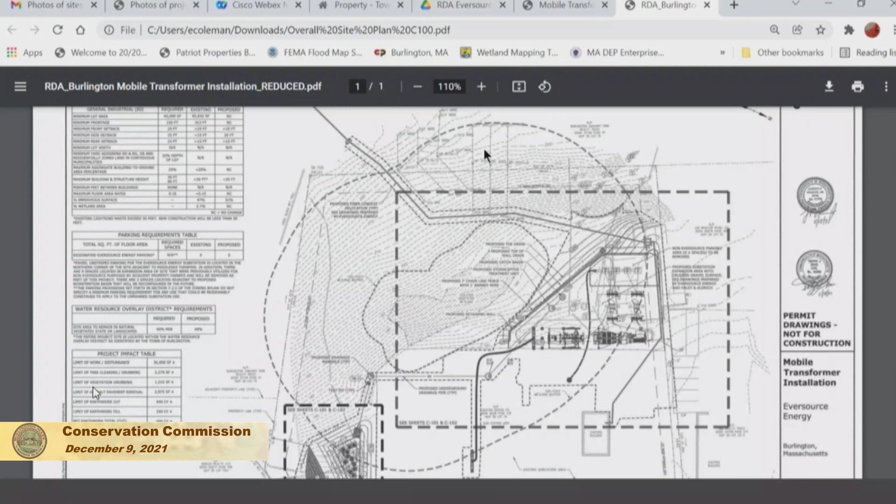Thank you. Good evening, everybody. Tighe and Bond filed a request for determination of applicability on behalf of Eversource for the proposed installation of a mobile transformer, part of a proposed expansion of an existing substation at 64A Middlesex Turnpike. The RDA is filed because there is an existing isolated vegetated wetland within the 2.2 acre parcel. We delineated that wetland in October 2021, and it is jurisdictional under your bylaw. The RDA is being filed because a portion of the proposed work within the subject parcel is within the 100-foot buffer zone of the isolated vegetated wetland. However, there is no work within the 20-foot no disturb zone, and no work is proposed within state jurisdictional wetlands.

In terms of our request, we're requesting the commission consider issuing a negative determination, confirming that the proposed work will occur within the 100-foot buffer zone of a locally regulated wetland, but will not alter an area subject to protection under your bylaw or regulations.

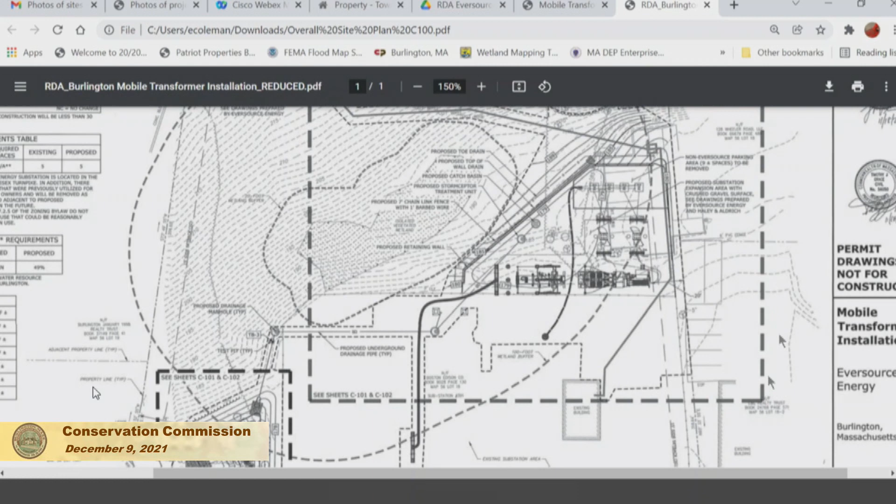In the middle of the plan sheet there, you can see the isolated vegetated wetland and the 20-foot no disturb zone. We have an approximately 26,000 square foot limit of work that is demarcated with hatched lines throughout the substation parcel.

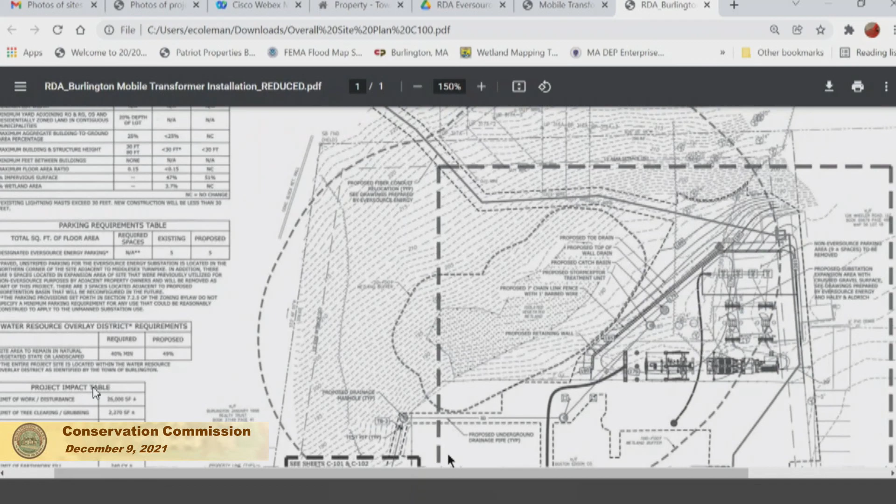Approximately 16,000 square feet of work is proposed within the 100-foot buffer zone. We've been careful to limit disturbance as much as possible, so about 2,370 square feet of vegetation removal and grubbing is proposed, a portion of which is in the rear of the substation in the proposed expansion area, which is about 6,500 square feet. Also in the southwestern portion of the parcel, bottom left corner of the plan, is a proposed bioretention basin, so there's a little bit of grubbing that will occur in that portion of the site.

There are 6 or 7 main components to this project. The main portion is the expansion of the substation, about a 6,500 square foot area in the rear, where the proposed mobile transformer, circuit switcher, and other related equipment will be installed. We also have a proposed 142 linear foot retaining wall to the left of the proposed equipment, and the proposed bioretention area in the southwest corner of the parcel. Throughout the site, there's proposed ground grid, underground distribution, conduit circuits, and fiber relocation areas.

In terms of construction period BMPs, we're proposing a number of them. On the plan sheets, we depict a stabilized construction entrance in the northern portion of the site, and in our details we show a stockpile protection area. We've also got silt fence and protective measures around the isolated vegetated wetland and other areas of the site.

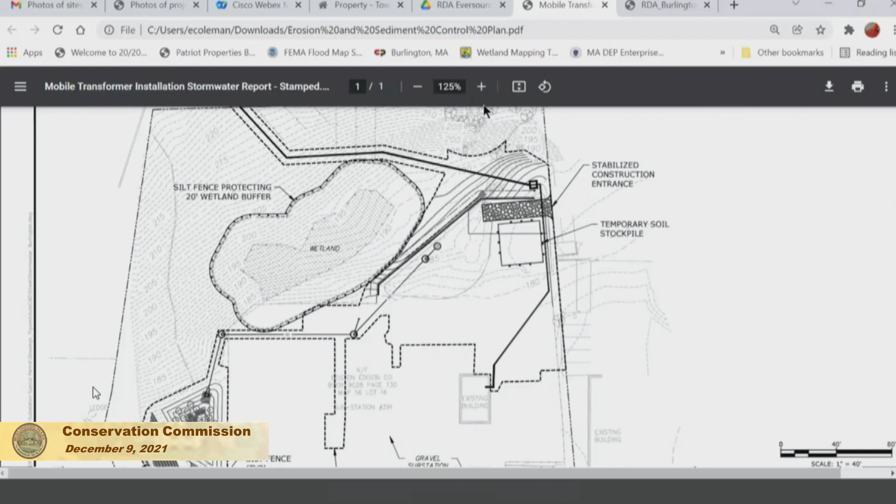That's an overview, but at this point I'll open it to questions, or if you'd like more detailed information on any pieces, we can elaborate on that. Ms. Roberts, thank you for that.

Ms. Roberts? Yes. Could you, before we open it up for questions, elaborate a little bit more on how the drainage is now and how the drainage will be, for the commission? Where stuff flows, here's how it flows now, here's how it will flow, or if there's no change, you would say that, for example.

Okay, if you don't mind, I'll turn that question over to Tim Grace. He's our engineer and designed the stormwater management system.

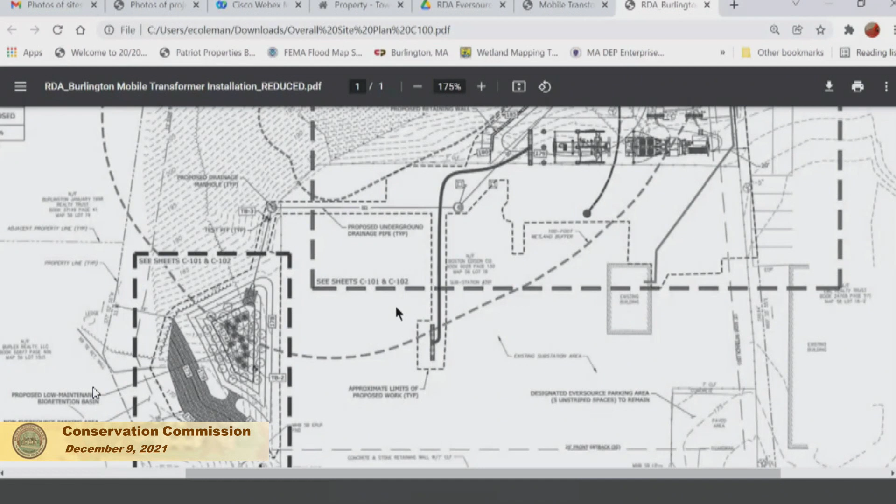So I guess real briefly, the existing stormwater at the site isn't really treated at all. It essentially just flows off in a couple of directions to the northeast and then to the south, because there isn't any existing stormwater management at the site. What we're proposing is somewhat of a prototypical system with deep sump catch basins, drain manholes, and a stormwater treatment unit to eventually daylight to a bioretention basin that is proposed to be planted with low maintenance, pollinator friendly native species of plants. So based on that alone, it's a significant upgrade to the site just by introducing those features, and being able to actually detain, collect, and treat the stormwater before it's discharged.

Okay, and does the stormwater end up at the bioretention area at all? It does. The stormwater is basically detained completely in the bioretention basin because it's been designed to accommodate the volume of water for the 100-year storm. So even in a significant storm event, we don't expect to have any water actually leaving the basin. It's going to be detained and infiltrated there.

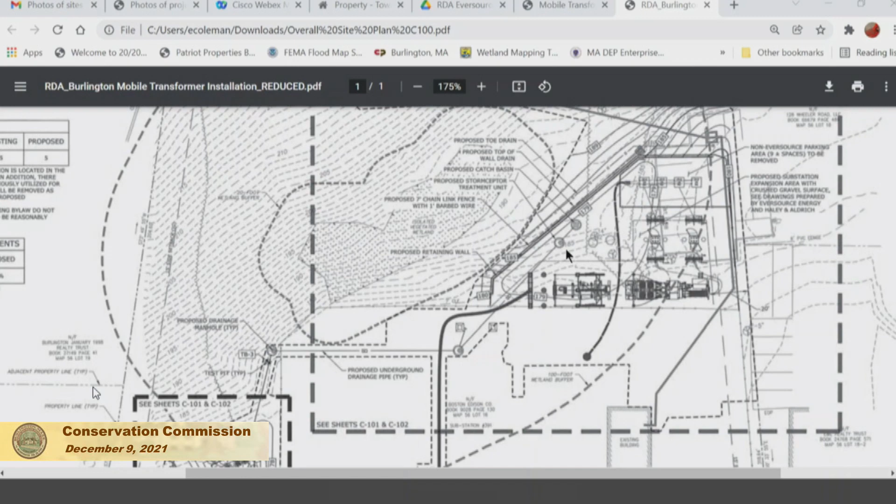Well, that'll be me. So as Jessica explained, this is an isolated wetland, so this project is jurisdictional under our bylaw only. They are doing some work that's coming fairly close to the wetland, including building a pretty significant wall and removing some vegetation. But I am pretty impressed by their proposed stormwater management. I like the fact that so much of it is being addressed, and so much of it is going into a bioretention area, so it's a nice LID feature. I don't have any issues with this project.

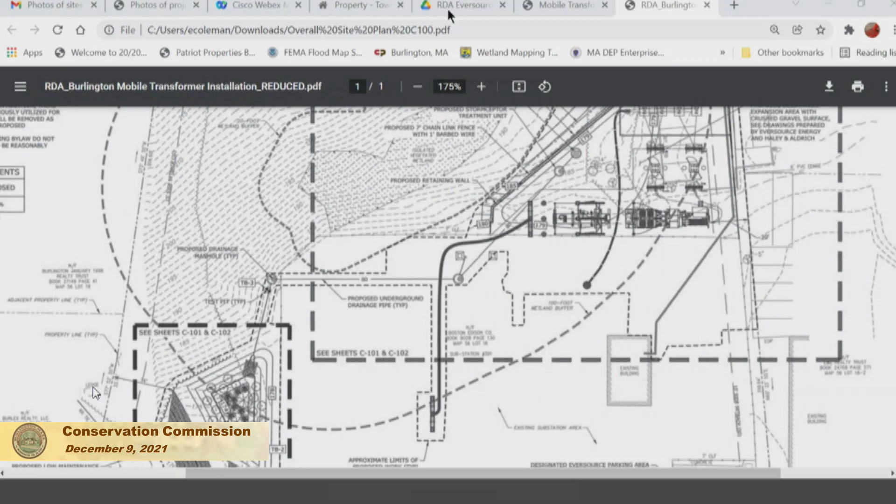It is driven in on a truck, so there will not be any foundation.

No earthwork. There's a little bit of a pad. Eileen, I think you might not have it pulled up, but we do have an image of what it looks like in our detail sheets at the end of the plan set.

Sorry to put you on the spot. No, you guys continue chatting and I'll find it, okay? Okay.

Yes, so it will be driven into the site, into the expansion yard. And you said there is a retaining wall, I see. How high is that retaining wall? Maximum 16 feet above grade.

And I would assume that has been designed by a structural engineer. Yes, Haley and Aldrich was the design engineer on this project for the retaining wall. Thank you, Indra.

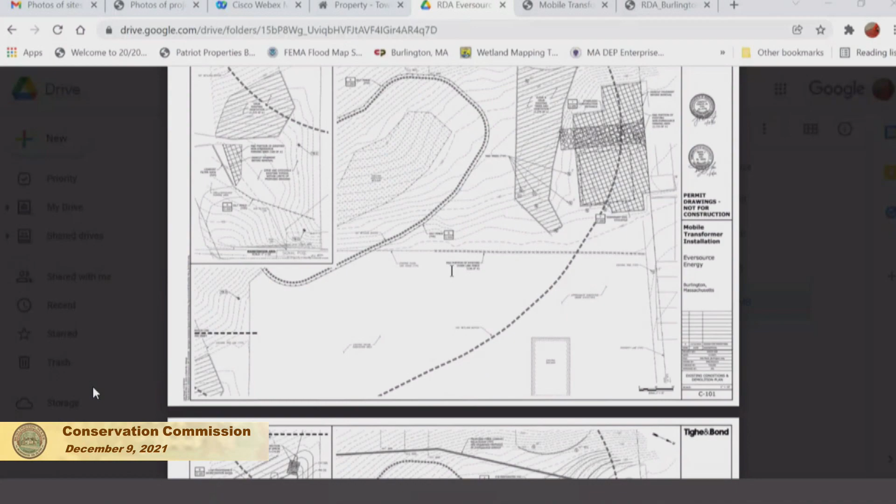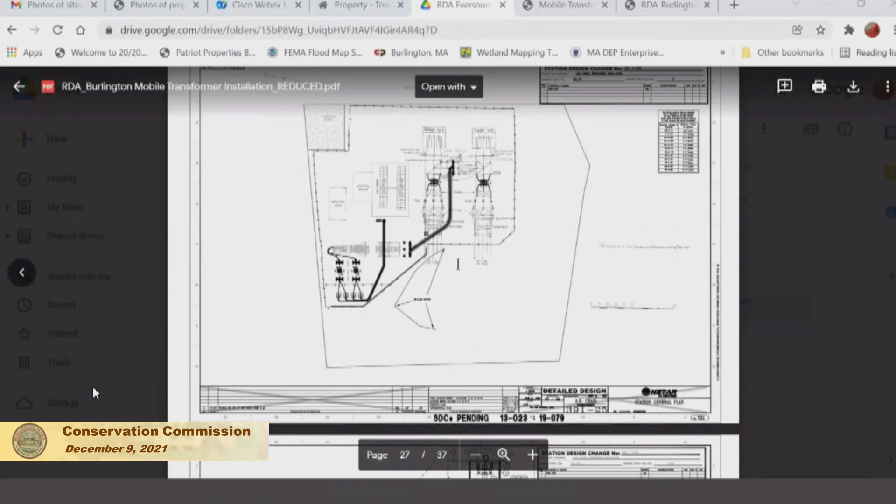Dawn, anything on this one? Jessica, which did you want to show them? It's toward the end of the set, on an Eversource drawing sheet, at the very bottom. Right before the wall sheet, sorry. Two more up, I think. There we go, it's up, one, back to this sheet, sheet 28. Yeah, it's a side view of the vehicle that the transformer sits on, right, the very bottom.

Yeah, thank you, Jessica. Yes. Okay, all right. Dawn, you with us? Yeah, no questions. Okay, all right.

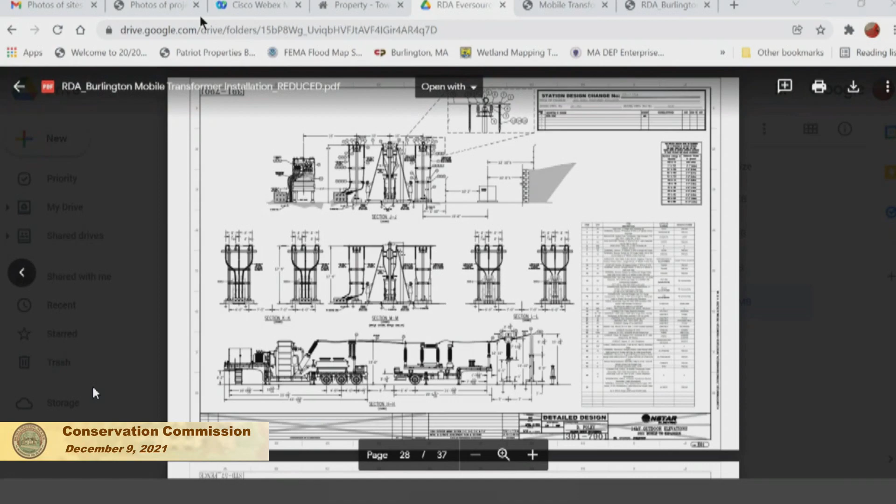And how about Bill? One question, and another educational question I want to ask. The first one: looking at the plan of the wetland area, it looks like there's quite a few gradient lines, like quite a slope. Is that actually holding water in spite of the slope? That kind of looks strange to me. It's almost a 7 or 10 foot drop across it.

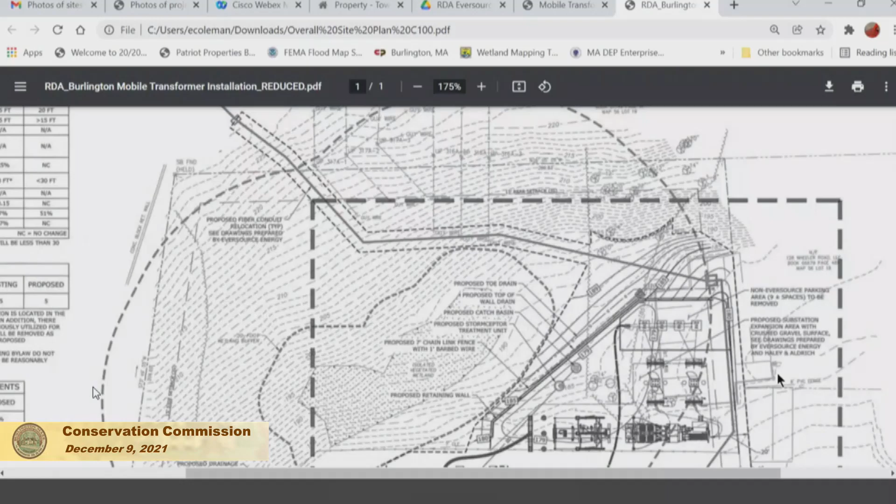It is. It's a micro depression on the slope. It's a 3,500 square foot wetland, and it's a subtle change, but the vegetation, soils, and hydrology met the criteria for us to delineate it. Interesting, because it's not really a flat water bowl of any kind from the drawing.

The other question I have is not related to conservation at all, but just to educate me: how is this an upgrade by bringing in these transformers? What does it do? Does it increase the voltage, increase the current, increase the reliability? What does it do to actually make it an upgrade?

Yes, it increases the reliability, and I will turn that over to Pete to elaborate, or to other Eversource folks if you'd like. Yeah, exactly, I was going to defer that to our team. Jeff, did you want to take that one?

Sure. Hi everyone, good afternoon board members. So the transformer would be an upgrade in the area, more so for reliability, since the capacity in the area is getting to its limit. The transformer would boost the area until we work more towards a permanent determination, because we're working on a brand new station in that specific area. So yes, the transformer will be more so for reliability and to boost the area at the same time.

Okay, thank you. Thanks, all right. Thank you, Bill. I think we're on Kent. Anything?

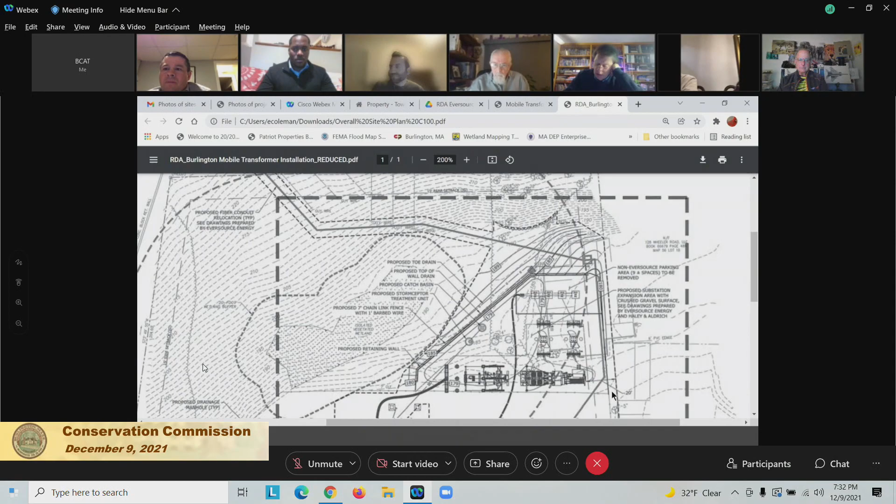I was just curious, what's the original size of the current transformer? Like what's the current lot size, square footage? Because I know it says there's an expansion of 6,500, but what's the original? I didn't see that.

So you're asking the current size of the pad where the transformer will be seated? Yeah, exactly, what's the current one? I just saw the expansion size, I didn't know what the original size was, square footage wise. I do not have that on top of my head right now, my apologies, but I believe it should be roughly 40 feet by 15 feet.

Okay, because it's going to be a trailer, like a normal size trailer with no head. It's just sitting on a flatbed trailer.

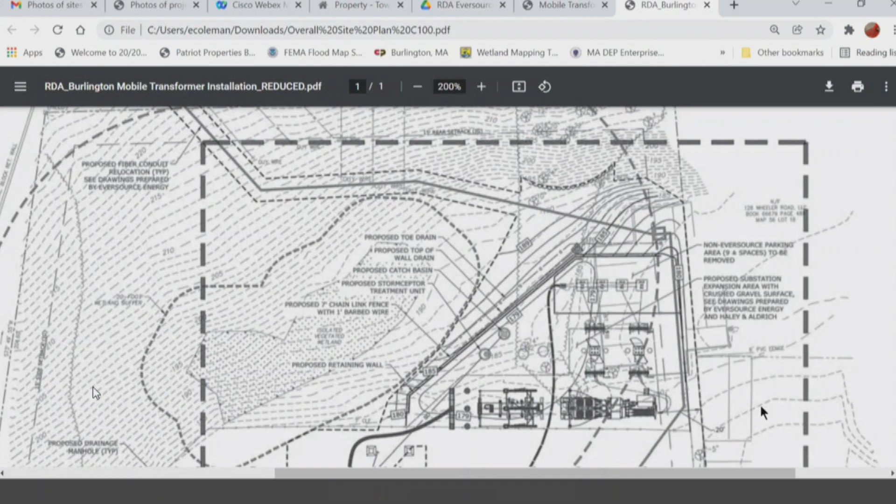Yeah, by pad, do you mean the mobile transformer pad? Yes. Yeah, actually all of that goes into that one drainage structure, CB1, within that area. Okay, got it. Now, on the bioretention area, that heavily shaded area from 178 to 170 elevation, is that like a level spreading feature for high volume water, high rain events? Yes, exactly. That's what we consider outlet protection, to make sure we don't have any scour or erosion during significant events.

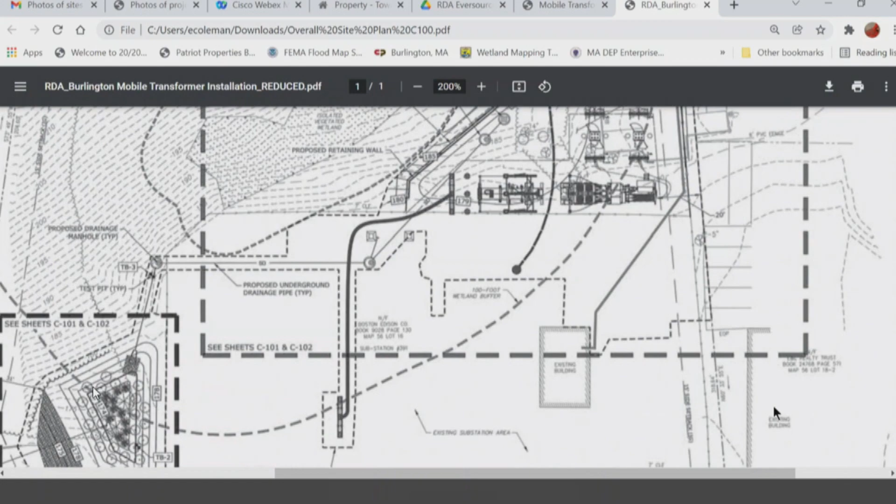All right, great, that looks smart to me. I understand now, and this looks like a substantial improvement - an unusually well-engineered and designed project for a request for determination. So you guys have probably set the standard for all future projects, perhaps, I don't know.

And Larry, John just reminded me that they also designed it to NOAA 14, okay, so a high standard too. So that's 7 inches - I mean, a 24-hour rainfall is 8.2. Is that what it is? 8.2 inches for the 24-hour, 100-year event. Yeah, 100-year, 8.5, something like that. Yeah, that's a lot of rain.

Must be climate change. Okay, is there anyone in the audience for this? This is the Eversource power station, located at 64 Middlesex Turnpike.

All right, I didn't hear anything from anyone. Is there anyone who wants to make a last comment? I guess I don't hear anyone. So, did anyone hear anything that these folks need to respond to before our next meeting, where I assume we'll talk about any changes resulting from the planning board, or alternatively, we'll be ready to just close this out and issue the decision. Is there anything that needs to be done?

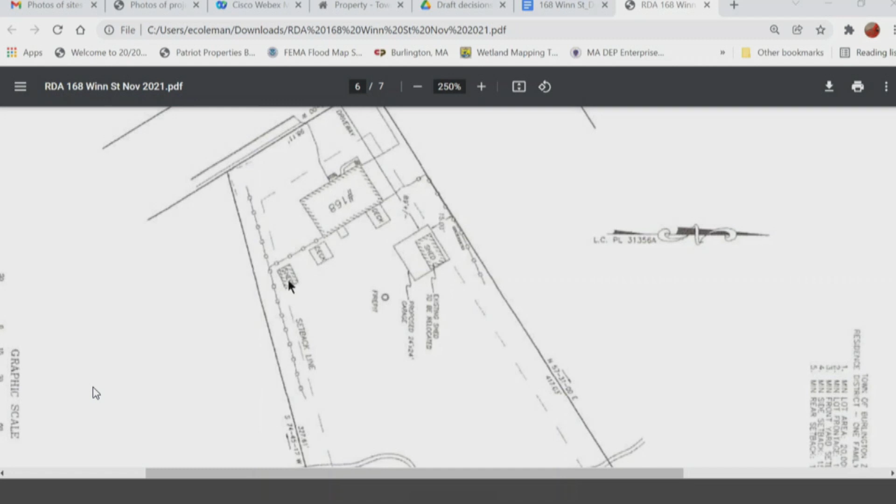All right, John and Eileen, one of you want to offer a few comments, please? Sure, I don't need much more than what Carrie said. As she's explaining, she wants to remove this small shed here, move it over to where this one is, and get rid of the old one because it's in poorer shape, and build a bigger garage on a slab.

The jurisdictional areas are, as she said, a wetland. She's sort of on the edge of the buffer to the wetland. And there's also this here, which is marked as brook. It's on the regulatory streams map. It is a tributary to a named stream, which I just can't remember now. It might be Sawmill. John will probably correct me about which one it was. So it's on the regulatory streams map, so she is within the riverfront area of a locally regulated stream.

Hence the RDA. All right, do you have any concerns over the project? I don't really. It is a slightly bigger footprint, but the entranceway here towards it is gravel, and as she explained, they don't really want it as a car storage area. They want it more for storing equipment, so they don't intend to replace this area with asphalt. So it makes it a fairly minimal additional change in the riverfront. I don't have any major concerns with it. Okay, all right, let's see if there's any questions.

Thank you, Eileen. Don, no further questions. Gail, no, not really. Indra, no. How about Bill?

So this stream is only locally regulated, it's not under the Wetland Protection Act? It's a locally regulated stream. Okay, so we don't have... and is this more than 100 feet from it? It's about, I think I measured before that it's 120. I have it on the determination and I've just forgotten the numbers now. Fine, all right, that's all I have. Outer riverfront. Yep. Okay, Kent, anything?

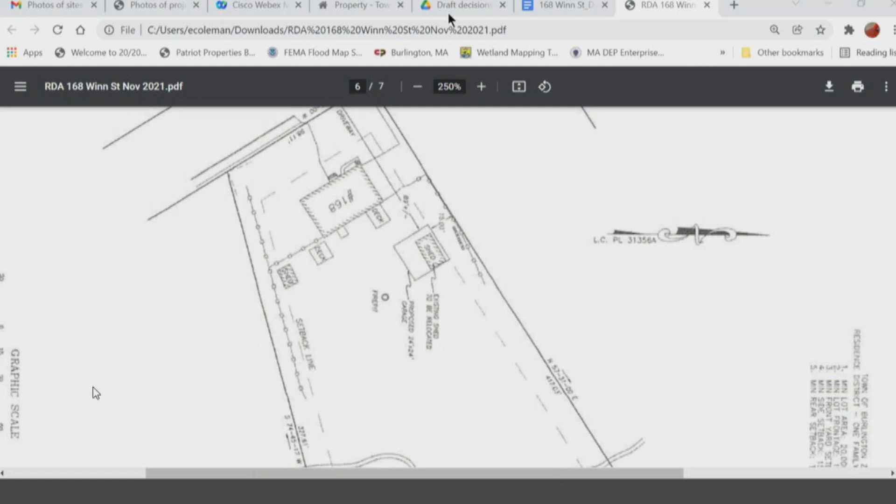Kent? We're not hearing Kent. Maybe his audio's off? He's muted at the moment. All right, Kent, we don't hear you, but if you hear us, we're going to go by you. Okay, and I guess it's up to me.

I just have one question for Eileen. Given its riverfront area, is there anything that we need to ask the owner to do that would improve the riverfront area beyond what it looked pretty clean to me, but beyond that?

That's up to you, Larry. You could suggest a few shrubs or something, but I hadn't initially, and I could certainly add that into the draft determination. I'm not sure I was feeling that, but the commission's welcome to say something if they want.

Well, that's why I asked whether it was just locally regulated or not. If it was under the Wetland Protection Act and it was within 100 feet, we would certainly want an improvement, but it's outside the 100 foot and it's just locally regulated, so I don't think that's necessary. Good point, Bill, thank you.

Okay, so I think we went through everyone. Is there anyone in the audience that would like to comment?

We are here tonight to request a negative determination for an old water pump house that is located on the access road to the site. Just a small portion of the building is located within a wetland resource area buffer zone, shown by this thick, heavy gray line running through the building.

The wetlands are located to the right of the screen, on the other side of the access road, into the site. We are proposing to demolish the existing building and the cutting and capping of existing water lines to and from that building, as well as electrical. There's an electrical overhead feed from wires from a utility pole across the access drive to a utility pole that then feeds an electric meter into the building.

We are proposing some erosion controls in an L-shape along a fence line of the property to the north and to the east, and then also along the existing swale system that handles the stormwater runoff for the driveway. We are proposing to install some additional erosion control devices in catch basins in that swale system along the edge of the roadway.

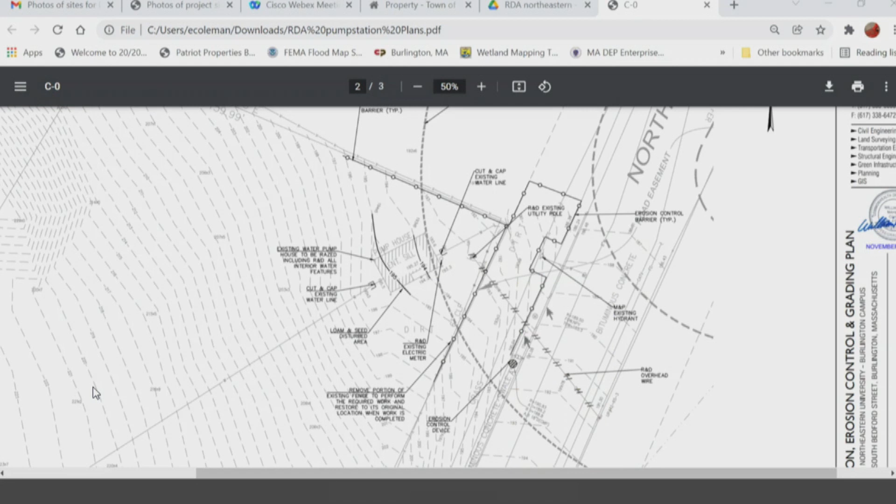Eileen will take it again. Bill made it all very clear. There's a wetland over on this side to the east of the proposed work. It's a small pump house. Several of us were out there today and we saw it. It's across the road from the wetland. As Bill said, they're proposing to put up quite a lot of erosion controls that will keep everything well away from the wetland. They're going to be cutting and capping the two water pipes.

The only question I have for Bill is just a clarification - I assume the water pipes will then be left in place, is that correct? Yeah, that's correct. Will they need to be filled or anything? No, because right now there is no water going through them, due to the new lines that were installed several years ago, not only for the campus project but also for the campus many years ago. So we're just going to abandon them in place after we cut and cap them, but we can plug them up if that is the board's wish. Not necessarily, I was just wondering. In fact, Larry, if anything, this is an improvement because they just won't have that pump house with its impervious surface anymore. Right, right. Okay, thank you, Eileen. It sounds like you don't have a major concern.

No, I don't have any comments. Gail? No, all set. Indra? No, all set.

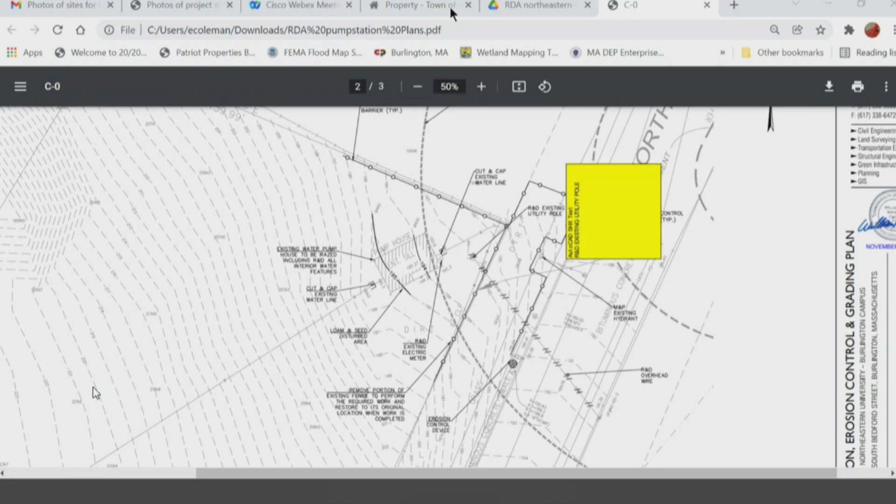Bill had a comment to help read such drawings in the future: it says R&D, like near the telephone pole - what does that mean? Remove and dispose. And the hydrant had another symbol, M and P, which means maintain and protect.

Kent, nothing to add. Okay, thank you. Two quick questions, sir: how long is this project going to take? I expect probably just a couple of months.

Okay. Because of the grading involved, do you or anyone on the commission feel that temporary stabilization, like straw or anything like that, is needed to prevent erosion into the street?

If you're asking me, Larry, it depends on when they do it. If they're waiting until spring, then no, I don't think so. Okay, Bill, when do you intend to do it?

In the late winter time, springtime, this could be like a March, April, May type project. So whatever seed they put down will probably take pretty quickly then.

But I'll go out to visit. My point is, if it's a 2-month thing and there's unstabilized ground with just erosion controls, because of the topography, some of the stuff might start to roll into the street. So you might need temporary stabilization to stop it during heavy rains.

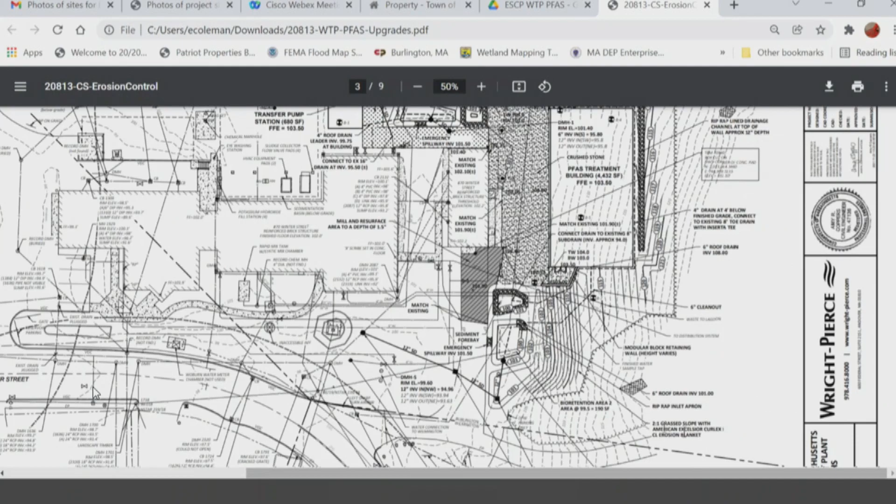The major components for this project for the upgrades to the water treatment plant include a transfer pump station, which will be located behind the existing water treatment plant. It's approximately a 32 foot by 20 foot building in the back there. And then the large PFAS treatment building, which is being constructed in the slope as shown, houses the pressure vessels that will remove the PFAS from the water.

Flow will be diverted from the existing treatment process, so that treatment plant will remain online. What we're doing is pumping water from the filters within the existing plant to the PFAS treatment building, and then returning flow back into the plant for disinfection before it is pumped to the town for distribution.

As part of the upgrades, because this is a really tight site with not much real estate to construct this building, we've made the building as tight as we can while providing flexibility for the town in the future to add additional treatment systems if needed. But as you can see, it's a very congested site with utilities.

We have expanded the entranceway so we have access to those buildings. We've extended a crushed stone drive to the PFAS treatment building, and we've designed 2 bioretention areas for all the runoff, treated first in sediment forebay areas before going to the bioretention areas. The site is also a challenge because we have high groundwater, so we did not assume infiltration on site due to that reason.

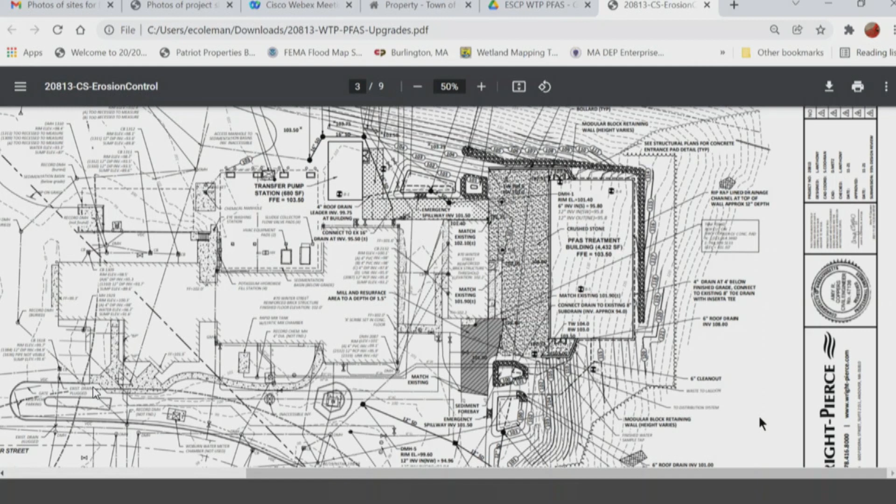Okay, so it's well above the ground level. One of my concerns about this swale is, what if there's a tree fall or something and it gets blocked and the water can't drain through the swale? Is it going to build up and perhaps have some way of infiltrating into the building? Were you using the building as a retaining wall?

We do have a perimeter drain as well around that building. It's a dashed line that's around the footprint of that structure, you might be able to see it. So that would be a backup if there was a breach of the other system. Yeah, that's going to help drain any runoff and water behind that structure. Okay, you answered my question. Thank you.

Okay. Kent? Not all the questions I had were addressed. Okay, thank you. A couple of things that I have.

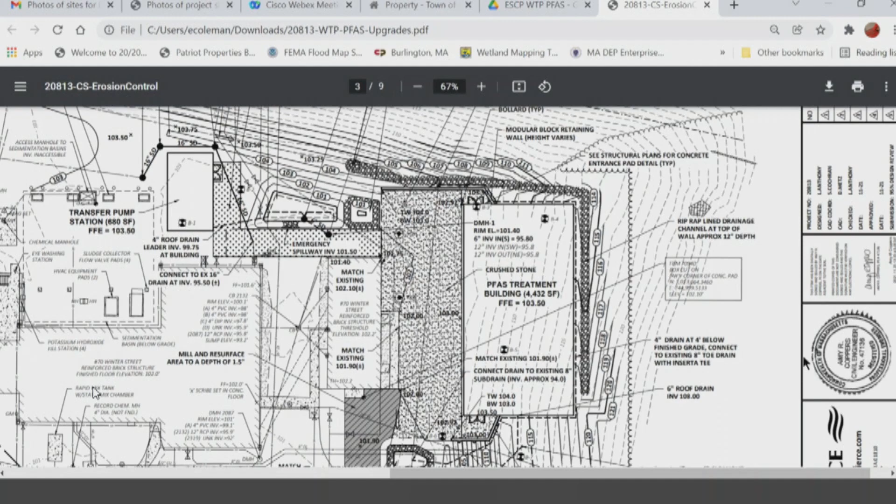At the end of the riprap lined drainage channel at the top of the wall, 12 inches deep, it seems to be catching the flow of water down the hill from the dam and the flow of water to the right of the building as you're looking at it. Is that correct? Yes. And you said that the water is going to roll off the side of the building and into the drainage features. However,

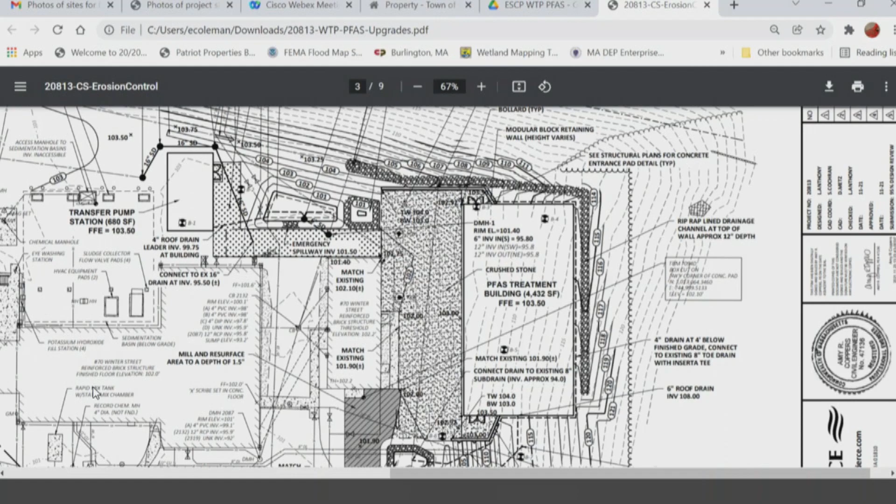Should you be showing proposed contours that are indicative of a swale so you don't have erosion? I think we have a detail for that on one of our detail sheets. Let me see if I can. And I don't know if it's obvious too - there is also a retaining wall. In addition to the building and the three sides acting as a retaining wall, we are also constructing a modular block retaining wall to protect the slope on that side.

Okay, it just seemed like water was running off just from the overall plan. So I didn't see any micro grading that indicates that - maybe I didn't look at the detail, but I did not see a swale that the contractor would know to construct. Yeah, we do have a detail on sheet C99 - I apologize, 502 - and it does show a stone lined ditch with 3-to-1 slopes.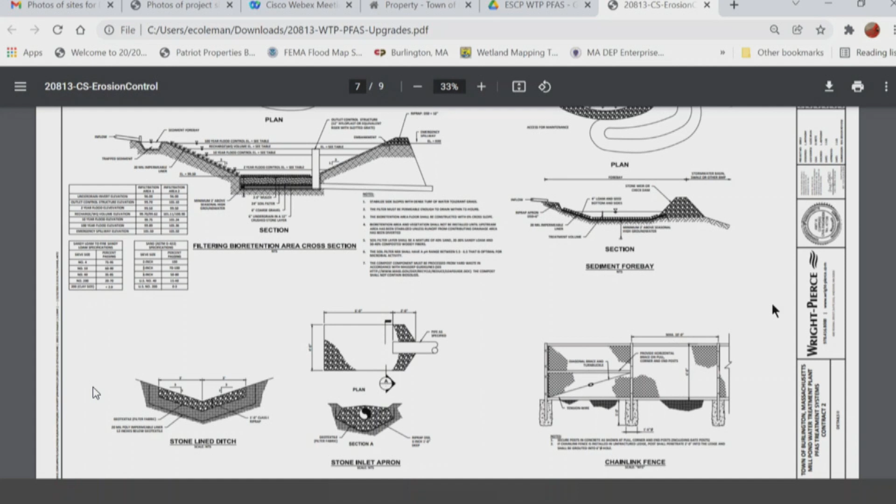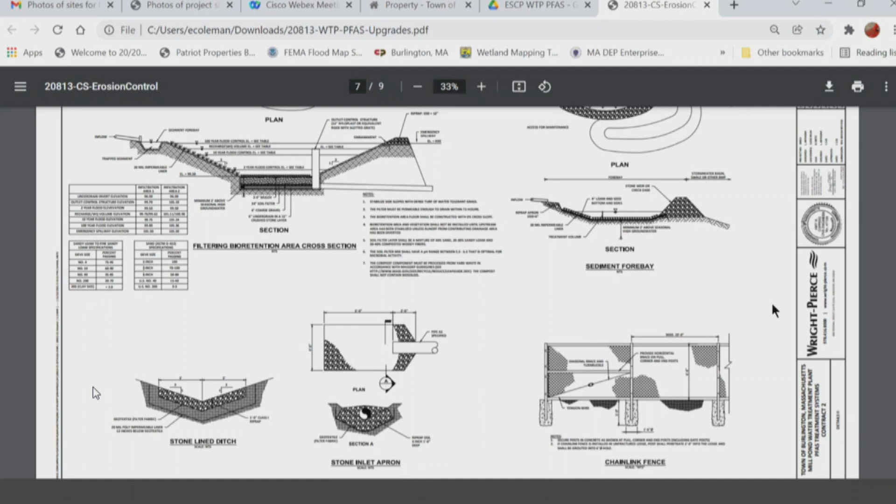Jeff, I'll let you speak to whether we feel we can design that without a liner. Yeah, we'll have to take a look at that and compare where we've got the groundwater information versus where these are located. I understand you don't want groundwater draining into the storm system, I get the point, but I was wondering if you could take a look at that. Yeah, there are 2 monitoring wells on site that are existing, and we did measure the depth of groundwater.

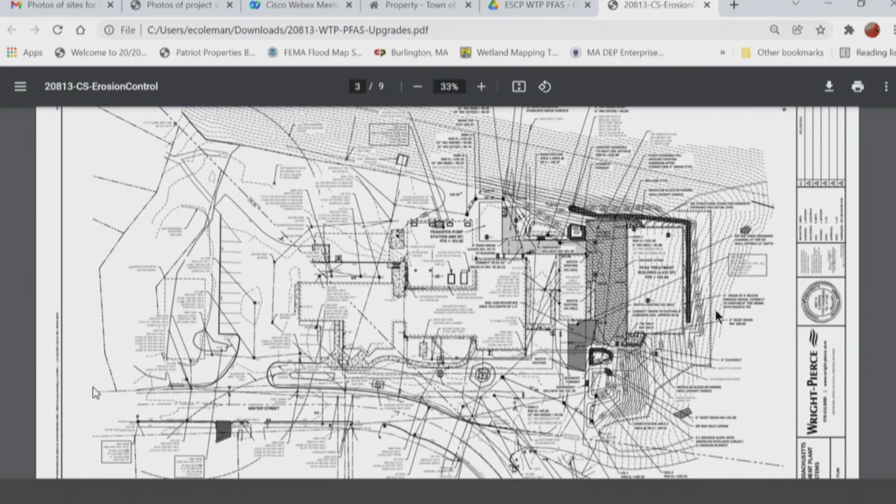I went back into the report on when those wells were installed, and they're located between the existing generator building and the large PFAS treatment building. If you zoom in, there are 2 monitoring wells in the crushed stone area, you can kind of see them. The depth of groundwater when they were installed, and when we checked them last week, was approximately 1.5 to 2 feet at those locations.

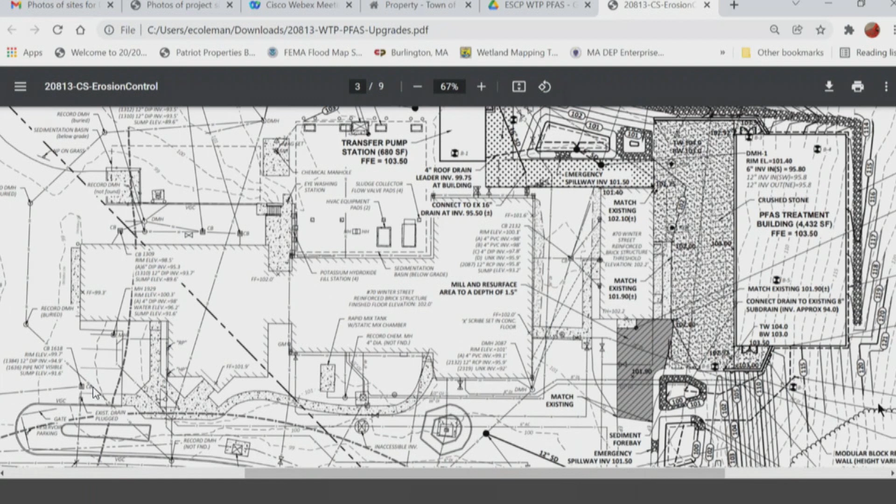Is that the estimated seasonally high groundwater, or the groundwater at this time of year? Well, it was the groundwater this time of year and when it was installed. So it seems to be... and when we did the borings on that slope, we found, I think on B3, and the other one, B6, which is also in the crushed stone area but closer to the street, we did have shallow groundwater there as well.

All right, could you take a look at what you got for those areas, and just see if we can take advantage of any infiltration we can get without purposely having rising groundwater being drained into the drainage system? Yep, we can look at that.

Larry, I have one question related to that discussion. You mentioned there are 2 monitoring wells. Why are there monitoring wells there? Is there some history of contamination? That generator building has a diesel fuel tank, and there was a small leak over time in the fill pipe that released some diesel fuel. The soils were removed under an LRA, a limited removal action, and I actually received the report from the Board of Health on that because it was closed out. So there was a small release, the soil was removed, and monitoring wells were put in to monitor if there was any further contamination to the groundwater, which there was not.

Okay, so there's no concerns there that would make you say, do not infiltrate because of contamination? No. Okay, thank you.

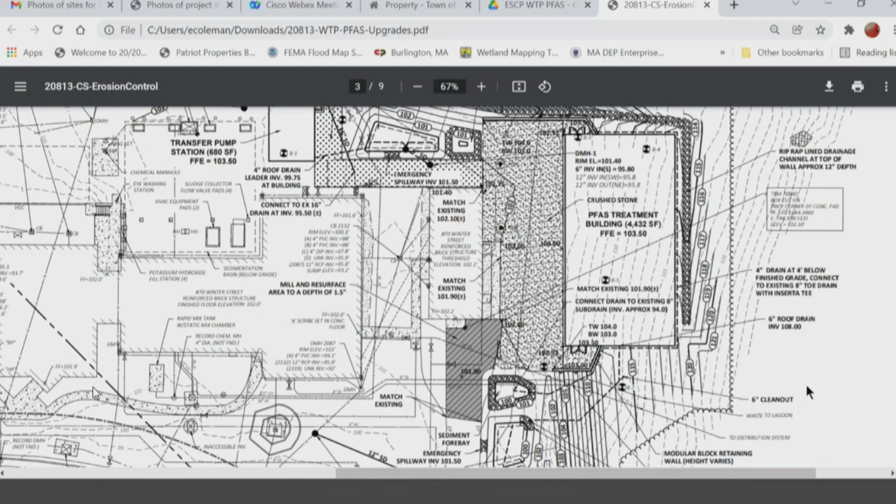Also, we'll get some infiltration in the walkway, the connection from the back of the generator building over to the new transfer pump station. That section is a reinforced turf section through there, so we are allowing some infiltration to take place along that feature.

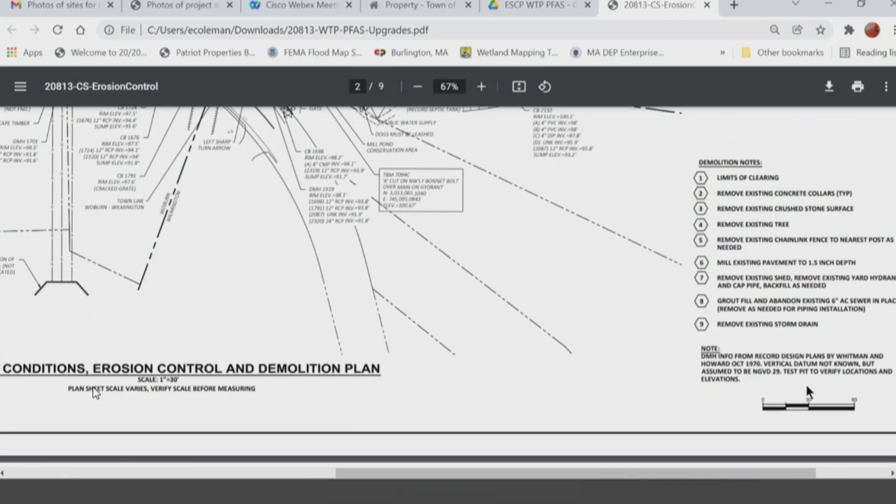All right, third question I have is what provisions do you have for temporary stabilization during construction? I get that most of it isn't going to run off into the street, but it might run off into your process building area and create kind of a mess for you guys. But do you have any plans for temporary stabilization during construction because of the slopes?

Yep, so we do have slope stabilization measures in the contract, and we have some silt socks shown as well. We are protecting the catch basins and drainage basins. We are also requiring a stone construction entrance for maintaining any soils on site. I think our plan is to move that further down, closer to Winter Street, but that will certainly help prevent the migration of soils off site. So between those 4 measures, I think we're minimizing disruption during construction.

Great, thank you for that answer. The back slope to the proposed PFAS building will be heavily mulched and stuff to keep all that material in place, so it's not getting in the contractor's way while he's setting his footings and getting the building constructed. So it'll be a key area to make sure we have good controls set up on. Yeah, that sounds perfect, Jeff.

The other question is a process-related question, for my own interest and maybe the interest of people watching. I assume the basic process is these large vessels of activated carbon, is that correct? Yep, so our design is for large granular activated carbon. We've sized them pretty conservatively for 40,000 pounds of media per vessel, and to treat the design flow of the facility, we have 3 trains of lead-lag vessels.

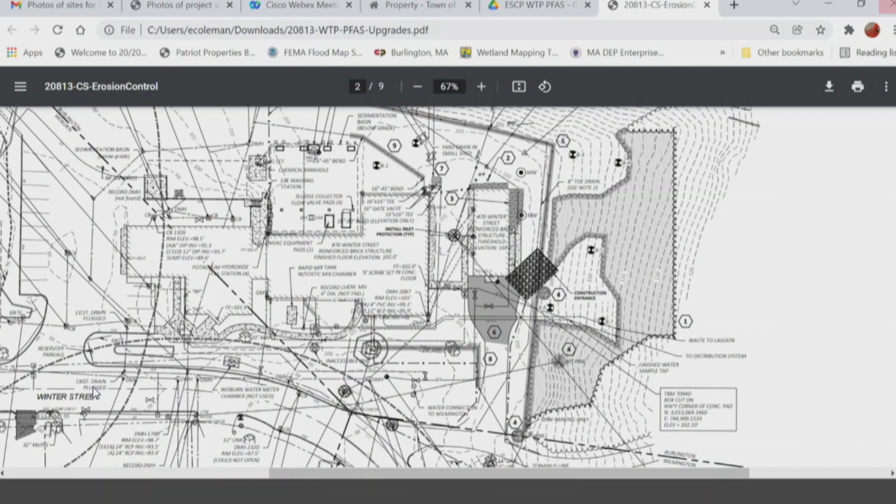I think we are... so Amy, thank you very much. Thank you for all your effort on this, and as always, John and Tom, it's always good to see you. You have to come back more often to visit us. Absolutely, good seeing you all. Thank you very much. All right, you folks have a good evening. Thank you, you too. All right, thank you very much. Okay, thank you, bye, Jeff. Take care, bye-bye.

Don't forget the roll call to continue. Okay, that's right. Could I have a motion to continue the erosion sedimentation control bylaw hearing for the town of Burlington DPW to construct a new water treatment and pump building? Is there a motion to that effect?

So moved, Gail. Second, Don? Okay, Don, how do you vote? Yes. Gail? Yes. Indra? Yes. Bill? Yes. And I vote yes, so that's a vote of, I think if I called everyone, that's 5-0-0. Very good, thank you.

Okay, next we're down at 7 Freeport Drive. It's a continued public hearing, notice of intent by Aswin Shaveri. It is to construct a residential addition, DEP file number 122-664. Somebody here for that one? Yes.

Okay, so would you like to make any comments at this point? Yeah, for the record, Stevie Cavallo of Farland Corp. At the last public hearing, we presented the project, we discussed a letter from DEP, and since then we've gone out, we've performed the soil evaluation, determined seasonal high groundwater. We've revised the plan to show the elevation of seasonal high groundwater in relationship to the roof recharge system. We've also added some plantings along the existing limit of clearing towards the rear of the property. And we've revised or updated the narrative just to make it a little clearer that the existing structures are to remain and that we're adding flood vents to the existing foundation, and that the proposed foundation will be built up on piles.

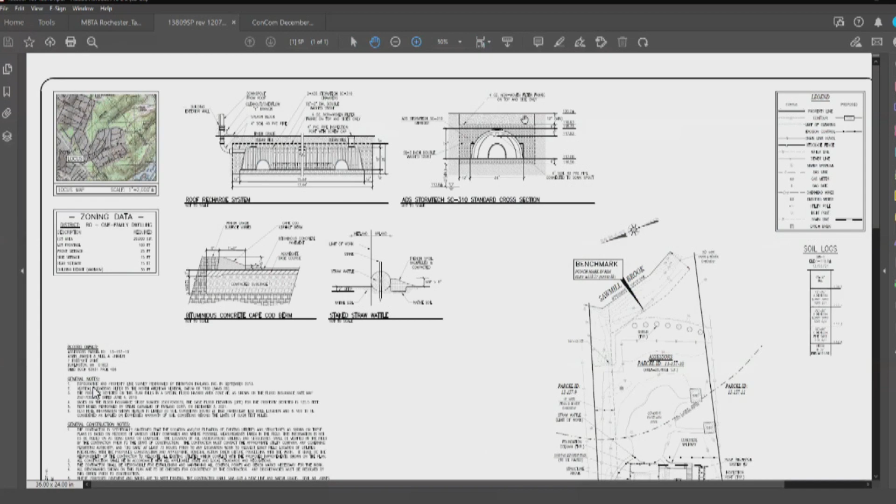So you're saying 72 inches is the redox? That's correct. Oh, it won't let me zoom in, huh? Sudden.

But we had 16 inches of fill and then down to 25 inches of buried A horizon, a very thin B horizon, and then we went down 84 inches with our excavation. And this is very fine sand. We probably could have gone deeper, but it just kept caving in. I've got photos that I took. The deeper he went, the more it just started to undermine.

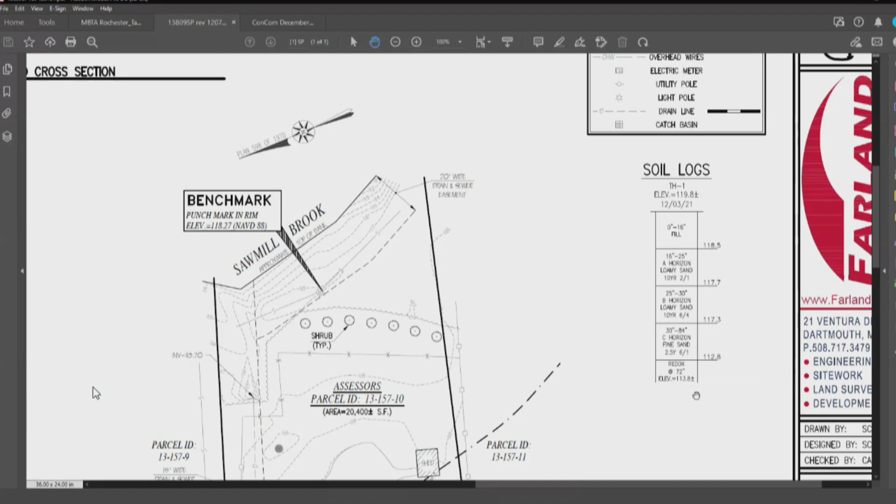And we observed seasonal high groundwater redox at 72 inches, which is at an elevation of 113.8. And then we added that to this detail showing the elevations of the system here and the elevation of seasonal high groundwater determined. We performed that soil test kind of in the middle of these two recharge systems, right here. That's where we performed it, which is actually probably the lowest spot in the yard there. It started getting higher here. We didn't want to do anything here because that's where there's existing pavement, and they do have an existing stockade fence, so doing something here just would have been difficult.

So that's one of the things the DEP said about the infiltration system, but they also said we should provide a functional analysis for the infiltration structures during the 25, 50, and 100-year flood events. What flood event will reach the units and compromise the recharge areas? We provided that in our whole notice of intent submittal, I'm not sure why it's not being mentioned.

We provided a summary table of runoff rates and runoff volumes, pre versus post. And in addition, we did a whole pre versus post analysis and provided all of that information as part of the initial notice of intent.

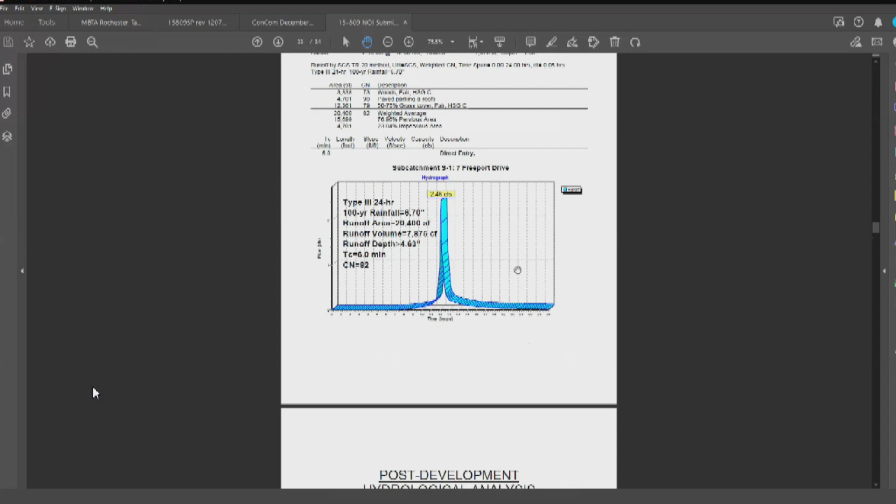So I don't think that's what their question is. I think their question is what will happen to that system if it's inundated by floodwater, since basically the whole site is underwater during a flood event. Will that compromise the system and damage it? That's how I interpret their question.

No, the system's meant to take stormwater runoff even if it's inundated by the 100-year storm. If anything, it's providing more capacity for flood storage, in the form of pure volume within the chamber and more void capacity in the stone around it. Once it's inundated, it's just full of water, like everything else in the area. Over time it'll percolate into the ground, or recede back to the brook in the back.

We have to write a decision that DEP is going to read and decide whether to intervene and appeal on. So I want to be confident that if that system gets totally flooded and inundated by a storm, it won't be damaged or compromised in any way.

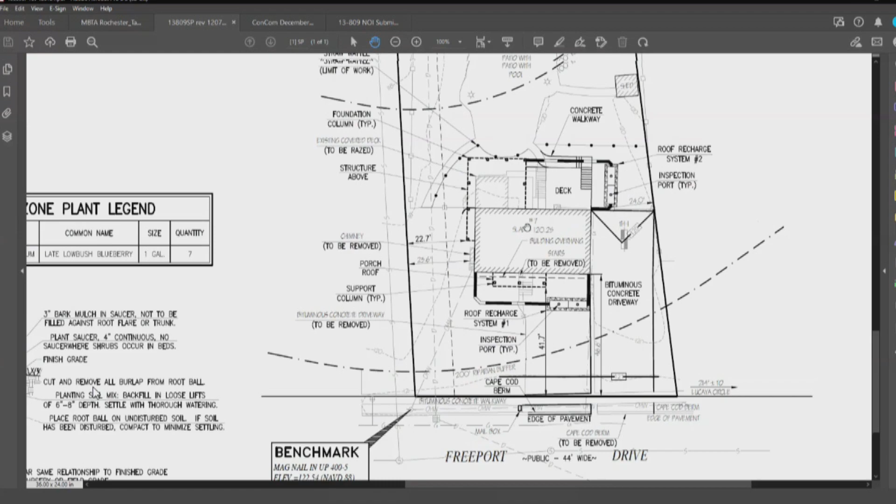No, it's meant to just take on all of the roof recharge. It has an overflow—once it fills up to a certain point, it starts overflowing here.

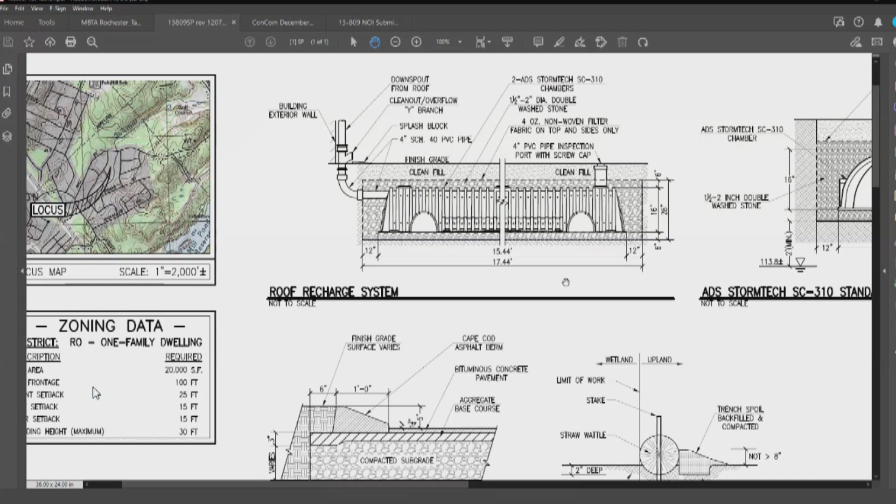John, do you think we need to request a narrative from these folks to answer any points made by DEP, so they can clearly see the narrative and refer to the supporting detail even if it's already submitted? I think we need whatever documentation we can possibly have, because DEP's obviously scrutinized this and they're going to be reading our decision when deciding whether to intervene.

I feel confident that they sort of misunderstood the flood vent issue because the filing was a little confusing, and the fact that the flood vents were just on the existing dwelling and not on the addition. So I feel confident we can write a decision that explains that and they'll understand it. But...

I just need something in writing from the design engineer saying this system will withstand inundation. So if the whole thing is under, say, 2 feet of water sitting above it, it won't damage it or structurally damage it. That's all.

You can't—John, I don't think it's our role to write that. We need them to write it, correct? Right, yeah.

We could provide letters, some sort of documentation from the manufacturer regarding the loading capacity, as far as weight over the system, if that's a concern. I'm not worried about it floating up or anything like that, with material above it. So I can definitely get some sort of documentation from the manufacturer for that effect.

One of the other things DEP asked for is something the commission's already discussed requiring: additional vegetation in the riverfront beyond the fence. That was in their letter and we've already agreed we're going to require that. Yep, that's shown on the plan.

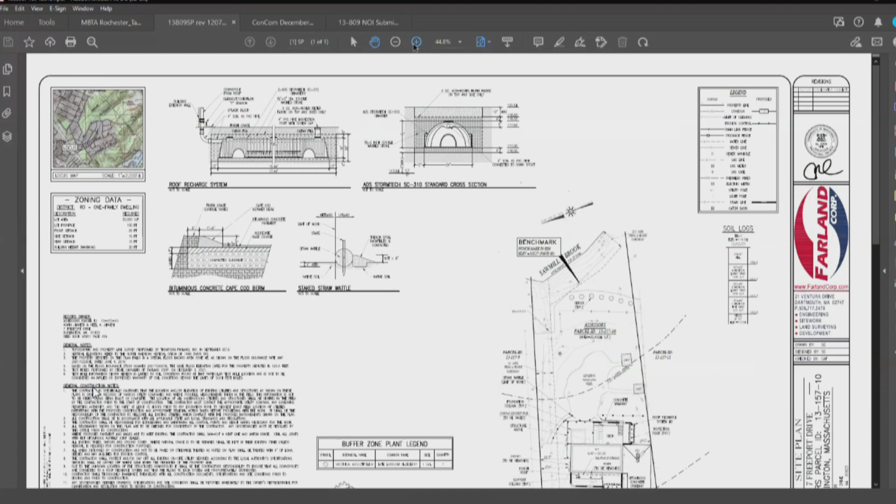You've got your downspouts which come down, there's a Y connection that serves as an emergency overflow, also with the option to clean it out. Then you connect Schedule 40 pipe and fittings right into this chamber. During regular storm events, the roof drains direct water into these chambers. Once they get full, they overflow, but they're designed to reduce the total site runoff for this particular property.

And each one will have an inspection port at the top brought to grade, so that you can inspect the chamber, make sure that it's not silted up, just be able to perform typical observations and maintenance.

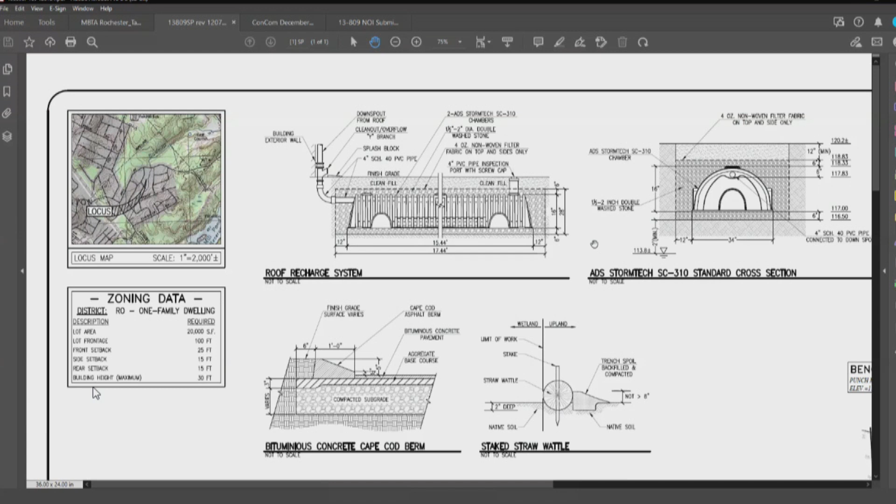Okay, let's go to the commission and see if there's anything further. Dawn, anything further on this? No, nothing further. Gail? No, as long as we have that documentation. Indra? No, nothing. Bill? So are we saying that we need to not close tonight until we get the documentation, or we're gonna close and the documentation is strictly for the DEP? No, we need the documentation to write into a decision. We have to incorporate it into a decision that we feel is defensible to DEP.

Okay. Anything else, Bill? No, that's it. Kent, anything? Nothing to add. Okay, all right, I'm all set as well. So is there anyone in the audience for this, the project at 7 Freeport Drive? Any questions from anyone else?

So can I just say, if you get us that information fairly quickly, we'll get a draft, send you a draft decision, and we'll have it ready to roll at the next meeting. Okay, so if there's nothing further from anyone, we will see you on January 13th, sir. Thank you. Very good. Thank you for your time. Happy holidays to all of you. Yes, same to you as well.